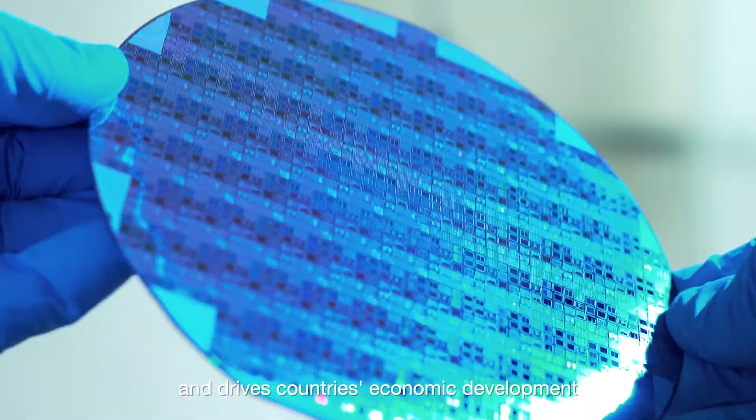Water sustains the habitats of countless living things. Its flow propels history and culture and drives countries' economic development. Water is our most indispensable resource.

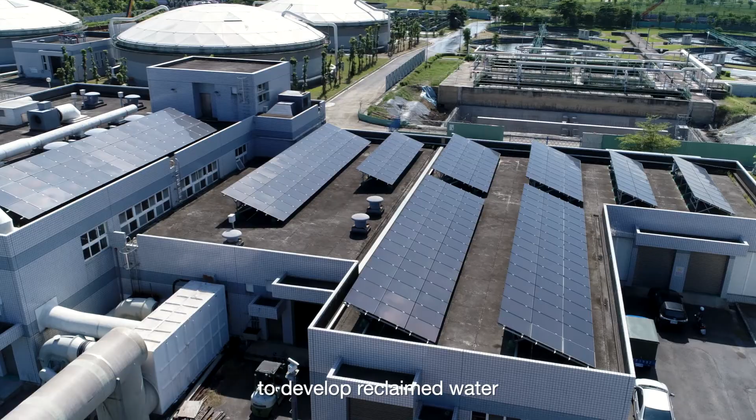To ensure the sustainability of Taiwan's water, we are taking vigorous action to develop reclaimed water and preserve our water supply indefinitely. The sustainable future of reclaimed water, the Fengshan Water Resources Center.

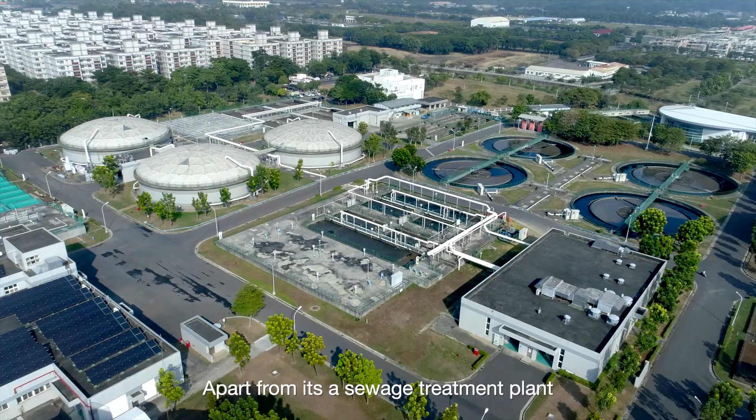The Fengshan Water Resources Center is responsible for treating domestic sewage from the Kaohsiung area. Apart from its sewage treatment plant, the center also includes Taiwan's first water reclamation plant. Additionally, it has specially established the Water Technology Education Center, which uses games and multimedia technology to convey the importance of water resources.

Also, it provides environmental and ecological education in connection with the nearby Baoan Wetland Park, forming an educational exploration area with the theme of water reclamation.

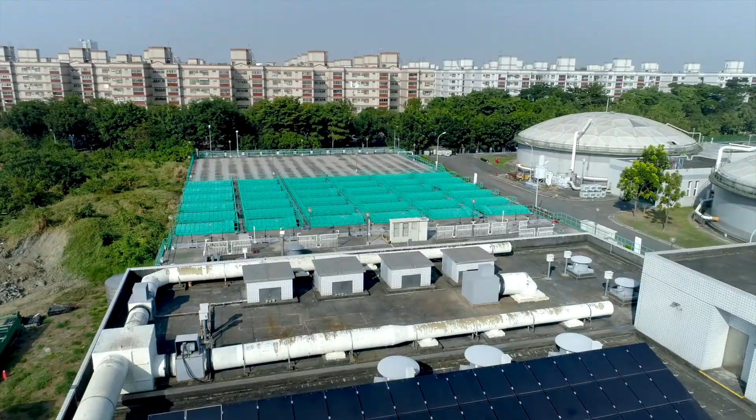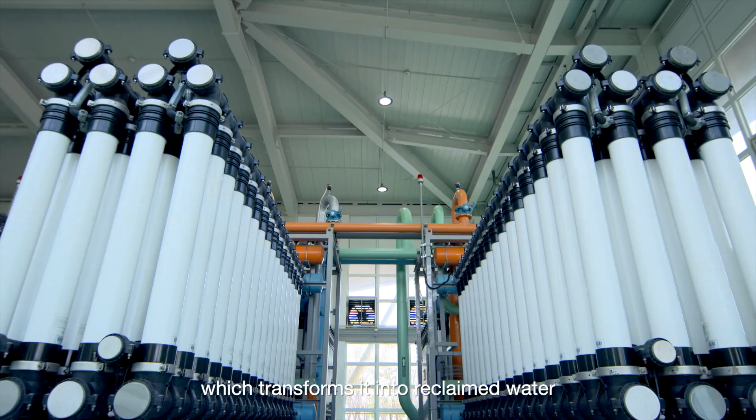When sewage enters the Water Resources Center, it is first treated in the sewage treatment plant, where it becomes effluent that can be discharged into the environment. The effluent is then filtered in the water reclamation plant, which transforms it into reclaimed water that can be used again.

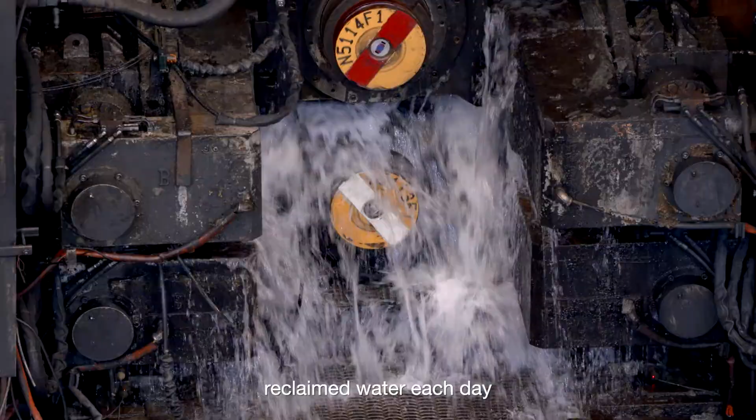The Water Resources Center produces 45,000 tons of reclaimed water each day, which is supplied to the nearby Linhai Industrial Park for further use. This has greatly increased the stability and flexibility of the water supply in the Kaohsiung area.

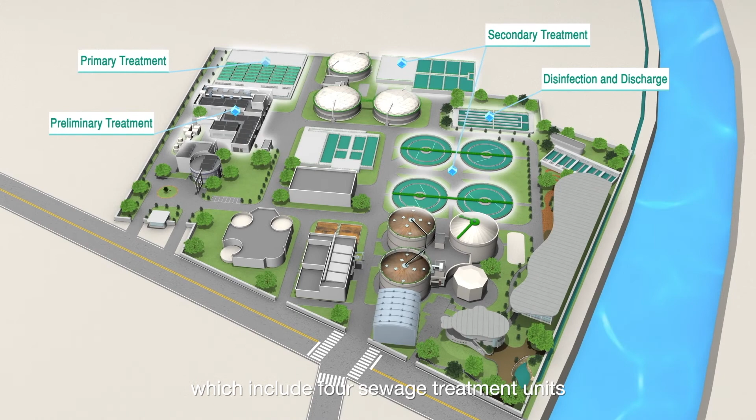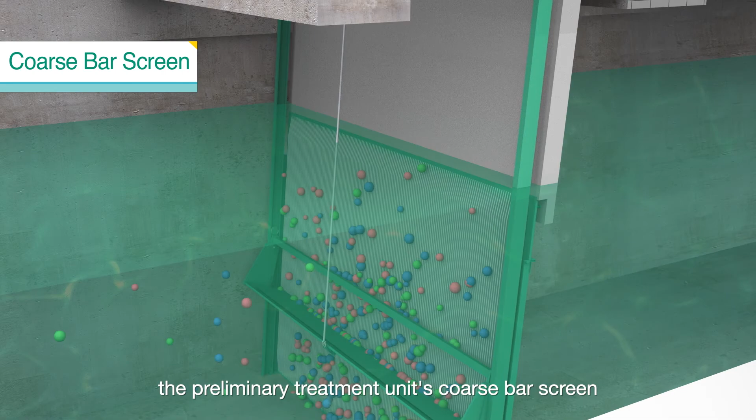First stop at the Water Resources Center, the sewage treatment plant. This plant has 5 processing units, which include 4 sewage treatment units and 1 sludge treatment processing unit. First, the preliminary treatment unit's coarse bar screen blocks any large debris and foreign matter in the sewage.

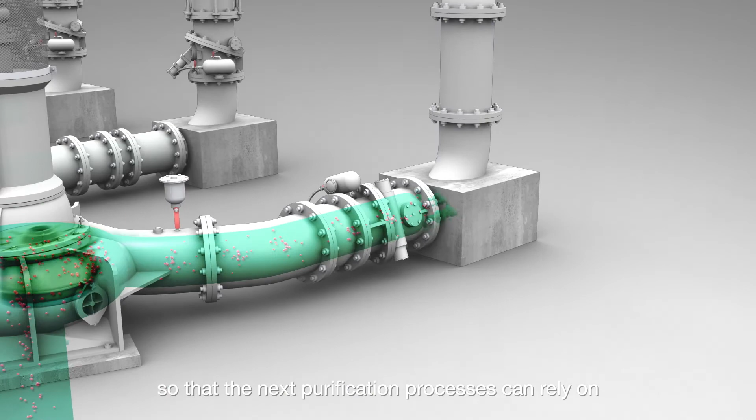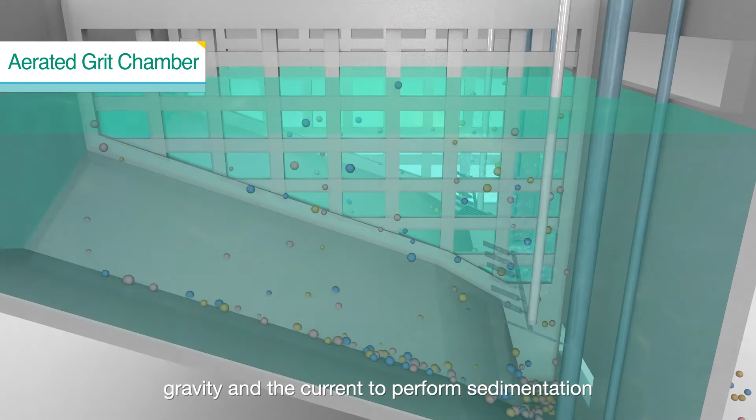Second, influent pumps are now used to pump up the sewage, so that the next purification process can rely on gravity to move the sewage. Afterwards, a fine bar screen is used to remove fine debris from the sewage. The aerated grit chamber relies on gravity and the current to perform sedimentation, and then pumps out any heavy sand.

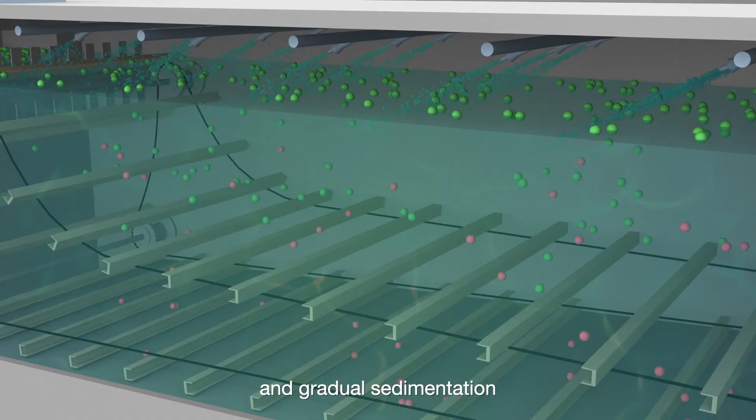The sewage now enters the primary treatment unit. The primary sedimentation tank employs gravity and gradual sedimentation to remove suspended solids from the water, and uses a sludge scraper to scrape away the sludge that settles at the bottom.

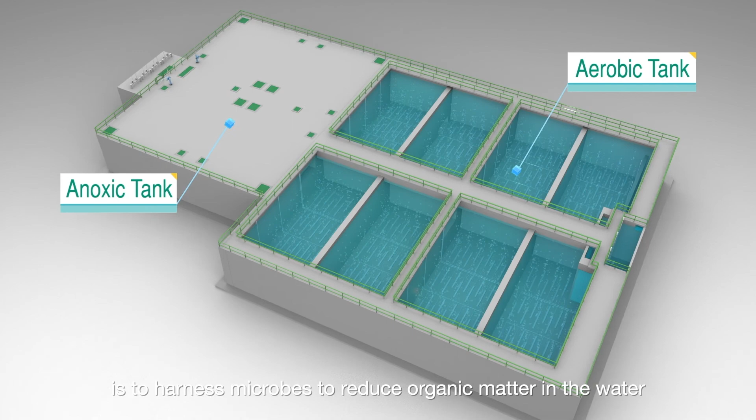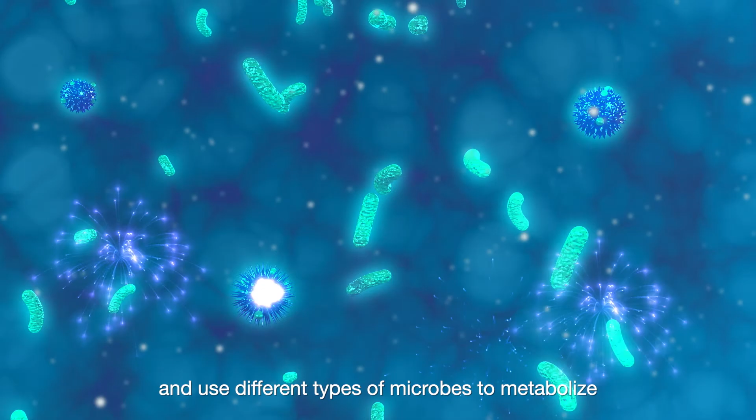The chief mission of the secondary treatment unit is to harness microbes to reduce organic matter in the water. At this time, the anoxic tank and aerobic tank take turns playing roles and use different types of microbes to metabolize and decompose organic contaminants in the sewage. The secondary sedimentation tank now takes over to perform sedimentation, which separates the water from the sludge.

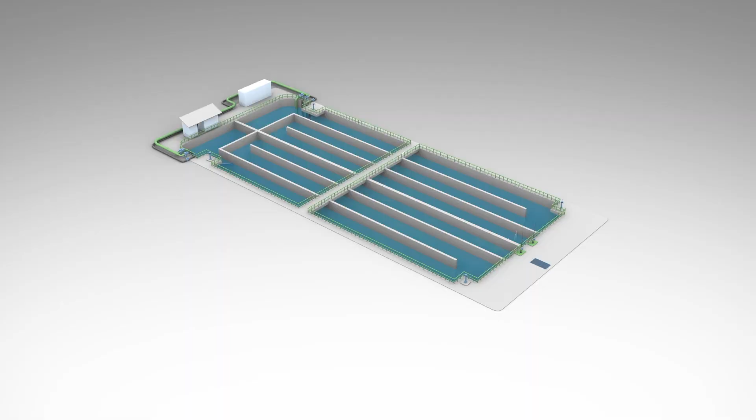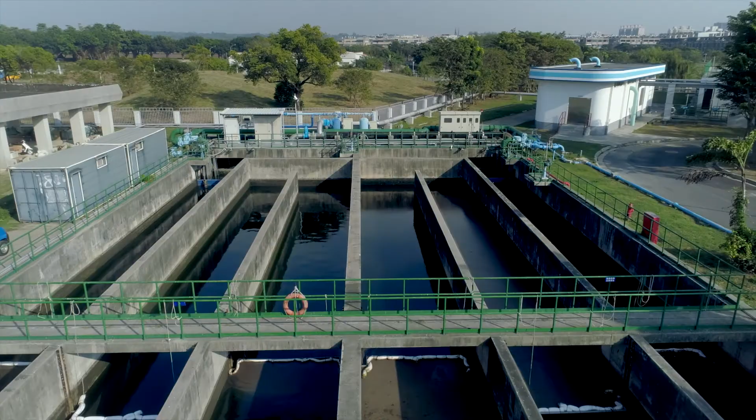The last stage is the disinfection and discharge unit. The disinfection tank adds chlorine to disinfect the effluent and eliminate any pathogens. This ensures that the effluent meets discharge standards. The effluent can now be discharged into a river or enter the recycling process.

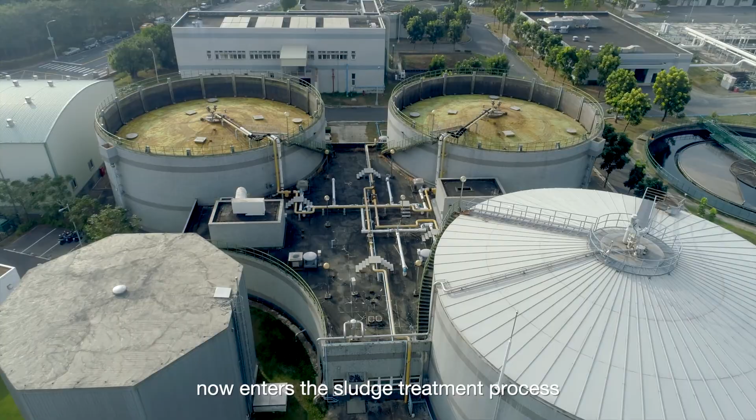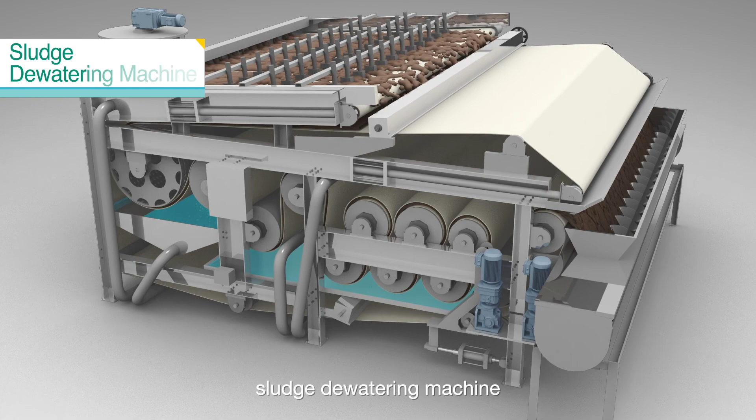The sludge produced in the sewage treatment process now enters the sludge treatment process. A sludge concentration tank, anaerobic digestion tank, sludge dewatering machine, and sludge dryer team up to greatly reduce the amount of water in the sludge while also reducing the volume of sludge.

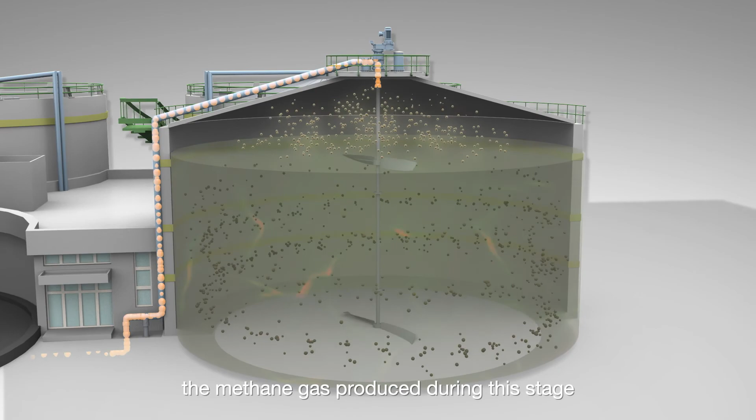At the same time, the methane gas produced during this stage is used for fuel for equipment in the plant, which effectively recovers and reuses energy.

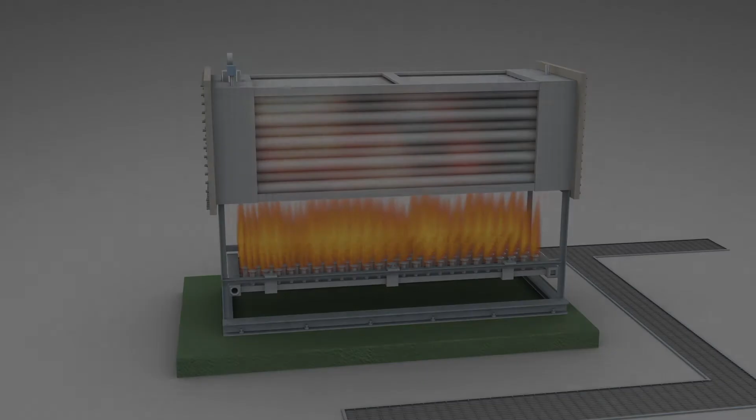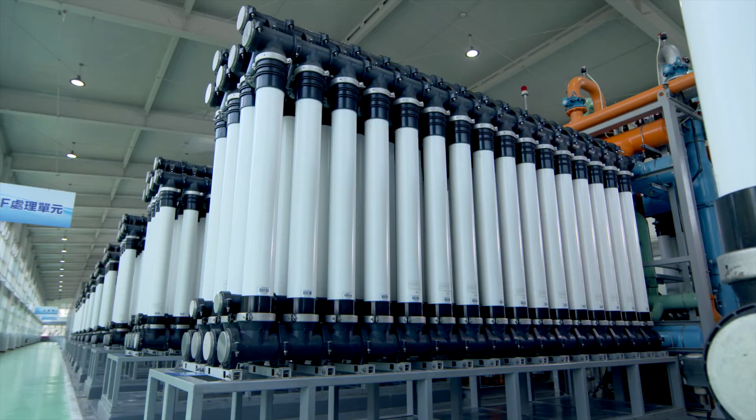Meanwhile, the treated effluent enters the water reclamation plant, where it is processed in a 4-step treatment system and becomes reclaimed water. This treatment system includes a rapid filter system, ultrafiltration system, reverse osmosis system, and transmission and distribution system.

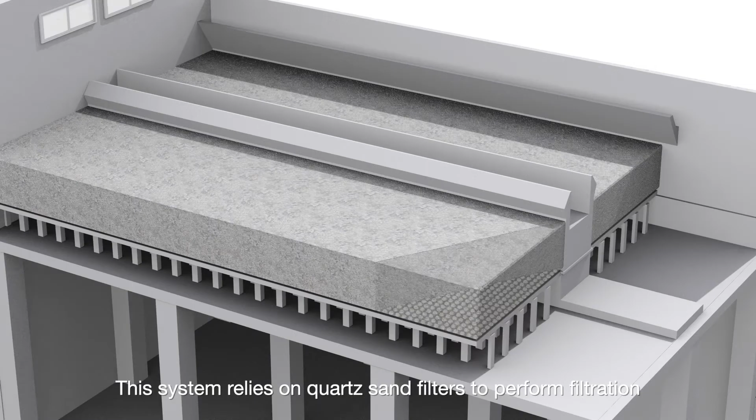The rapid filter system is composed of 5 rapid sand filters. This system relies on quartz sand filters to perform filtration. The sand filter layer removes fine suspended particles from the water, which lessens the turbidity of the water and reduces the load on the remainder of the treatment system.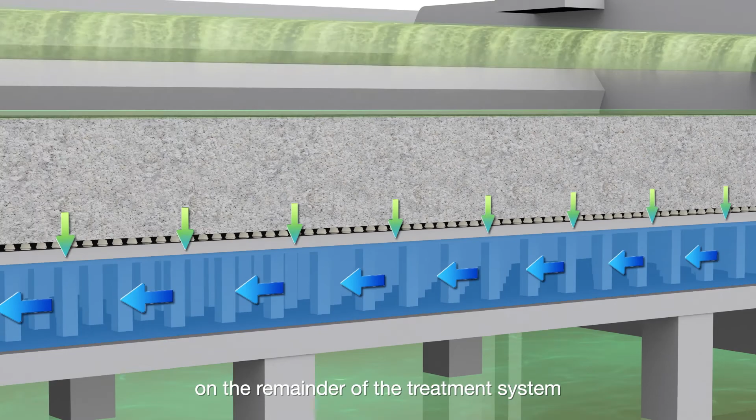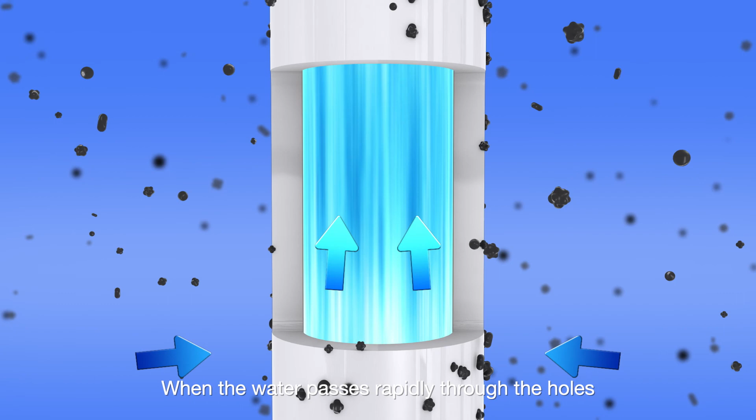The next step is the ultrafiltration system. The ultrafiltration system consists of a membrane made up of hollow fibers with countless 0.02 micrometer pores. When the water passes rapidly through the holes in this porous membrane, fine particles, bacteria, and viruses are removed from the water, and the water's turbidity is reduced even more.

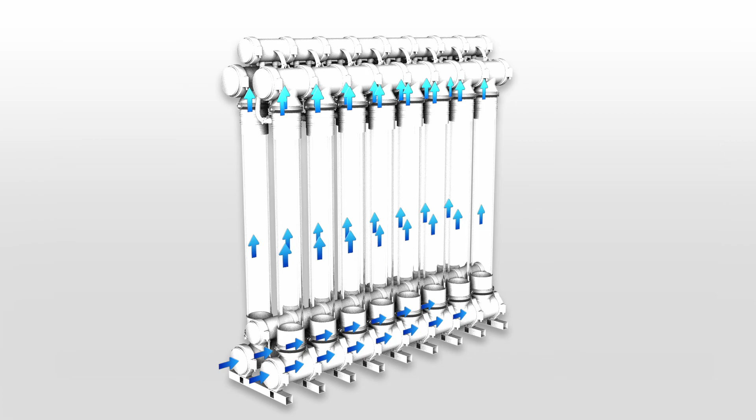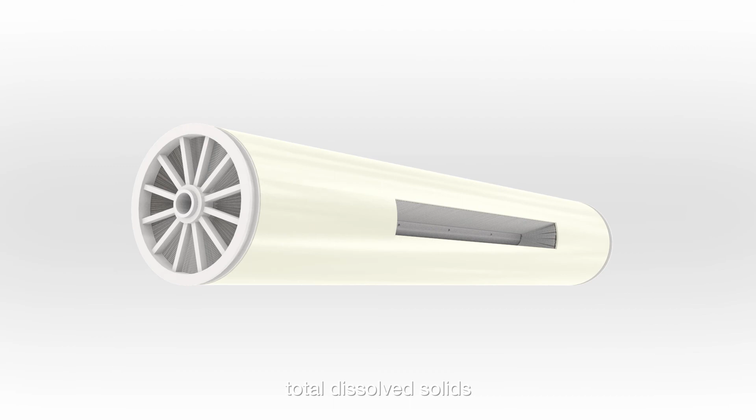The water now enters the reverse osmosis system. Here, the water is pressurized, and reverse osmosis membranes are used to remove total dissolved solids, hardness, total organic carbon, and ammonia nitrogen from the water, leaving superior reclaimed water.

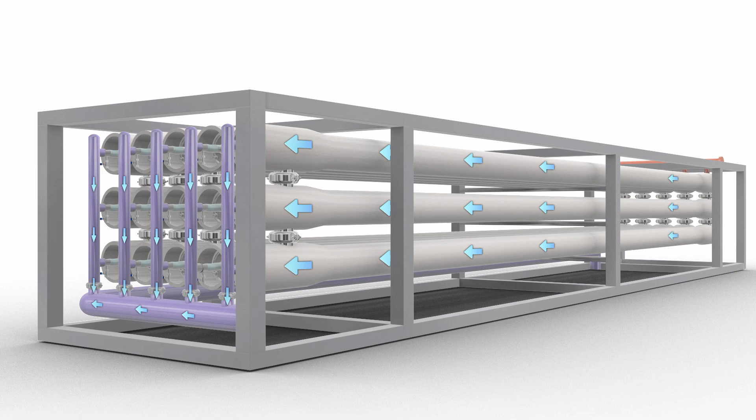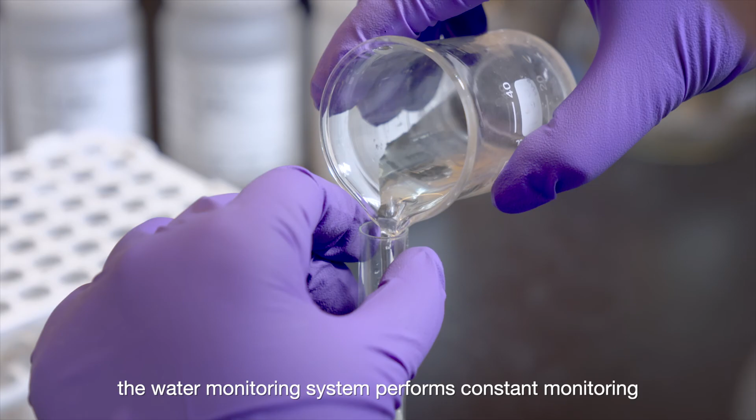The final step is pressurization in the transmission and distribution system, which sends the reclaimed water to users. In this process, the water monitoring system performs constant monitoring, providing solid assurance of superior water quality.

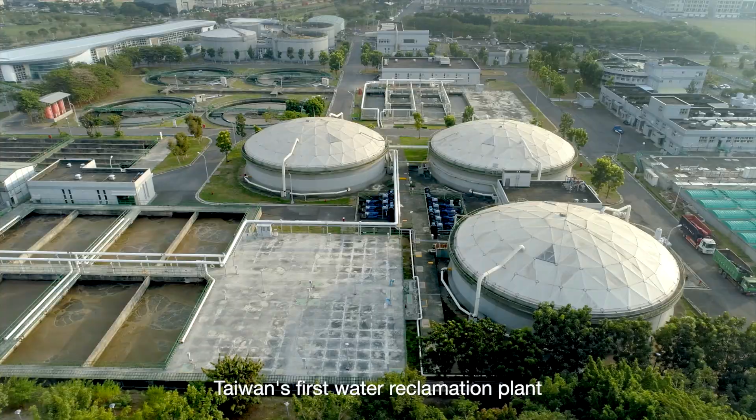Water affects our lives profoundly, gives our world growth and vitality, and allows possibilities to be realized. The Fengshan Water Resources Center, Taiwan's first water reclamation plant, has successfully increased Taiwan's water supply, advanced Taiwan's water resource technology, and brought Taiwan a new future of sustainable water resources.